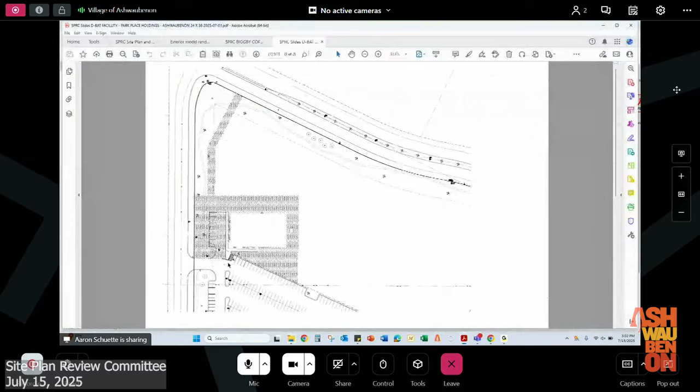Okay, there we go. All right, the requested site plan review is for a new building. It'll be fronted on Layden Drive with West Main Avenue to the north. As you see here on screen, this is a currently vacant lot that was part of the former Ameriprise building off of Packerland Drive in the business park.

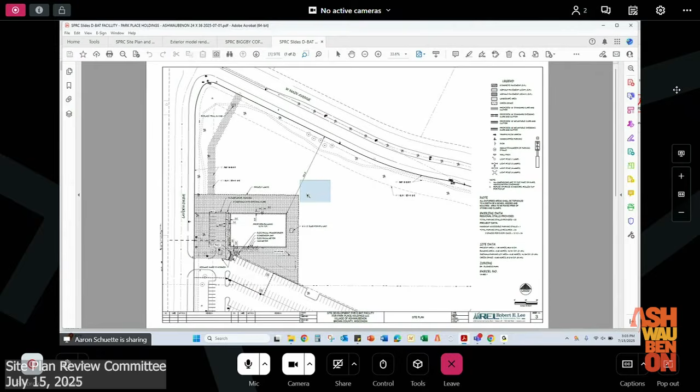As you can see, the proposed building itself, zoom in, a little over 13,000 square feet, parking lot in front, additional parking with cross parking access easements to the south to the existing parking lot. Building itself, and then just slide, continue down.

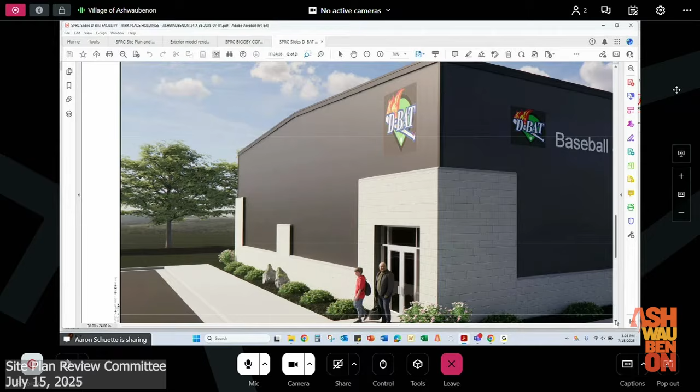Exterior materials that you see here include the minimum 3-foot masonry wainscot with some additional architectural detail with the masonry, smooth architectural metal wall panels with fully concealed fasteners.

Under the code, when you have indoor athletic facilities within the business park, there are certain criteria that do need to be met under the code. The staff report does identify how the proposed baseball training facility does meet those criteria, primarily due to the need for high ceilings for such a facility.

In terms of recommended conditions of approval: use of fully concealed fasteners for exterior wall panels, screen any rooftop or ground mounted mechanical units visible from the property boundaries or public right-of-way, submittal of a lighting plan for review and approval by the Community Development Department, locate ADA parking space on the shortest accessible route of travel from the adjacent parking to an accessible building entrance, meet all applicable requirements of the Ashwaubenon site plan review and all other applicable village ordinances.

From engineering: evaluate installing the sanitary lateral with the new water lateral on Layden Drive as opposed to West Main Avenue. Village engineer has been in contact with Robert E. Lee and Associates, the engineering firm on the project. They've been going back and forth, working through some alternatives on that.

Stormwater management: as disturbance is less than 1 acre of land in proximity to the airport, the bioretention facility is not required. Again, if there is to be more development on this property, whereby the totality of the disturbance exceeds 1 acre, then stormwater management will be required at that time.

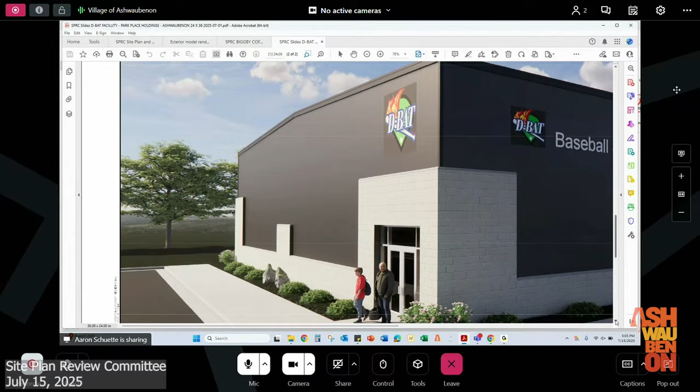From Bike and Ped, they identify bicycle parking near the entrance. Recommendation is to have bicycle parking meeting the standards of the Association of Pedestrian and Bicycle Professionals. Again, as a recommendation, that's just a best practice for the developer to consider. It's not something that we require under our code, but is a best practice. Just keep in mind, more of a heads up to the development team.

If you have any questions regarding the project, I'm happy to answer them. Otherwise, we do have a representative from Robert E. Lee in the audience as well.

Does anybody have any questions? None. Anybody want to make a motion? Move to approve with conditions. A second. Okay, we have a motion to approve with staff conditions. Any other comments, conditions, concerns? Hearing none, all those in favor say aye. Opposed? Motion carried. Thank you.

6B, consider, discuss, and act on a site plan review request for the Station 433 condominium building at 433 Aldon Circle, parcel VA-1556. Aaron? All right, I'll share my screen again.

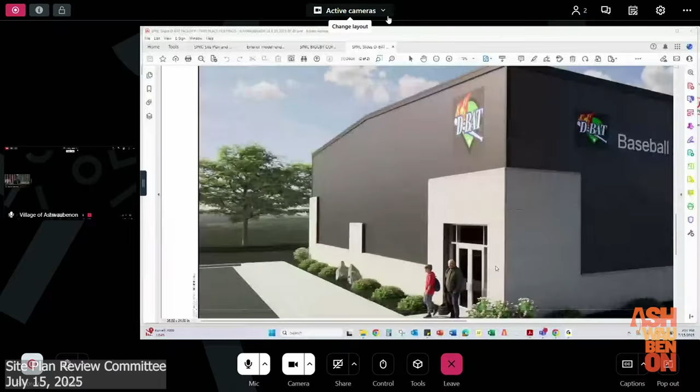Hopefully Adobe cooperates with me. There we go. All right. These are the exterior renderings of the proposed condominium building called Station 433 at Aldon Station. It's not going to cooperate with me. Bear with me.

All right, we'll start with the site plan. This is for Station 433 condominium development by Redo Homes.

This would be located immediately to the west of the current Station 417 condominium building, located on the Fox River and Ashwaubenon Creek, across the creek from Ashwaubenon Park. The project itself is located on the south side of Aldon Circle.

In terms of parking, there is parking at grade right here in front, as well as basically a podium style parking at grade with the residential units above them.

It should be noted that there are environmentally sensitive areas and floodplain on this property that will be taken into account throughout the development process, including the floodplain flood elevation of 587.7 feet. The first floor elevation is well above the flood elevation, so it won't be an issue. Just make sure you're going to maintain that grade throughout the process.

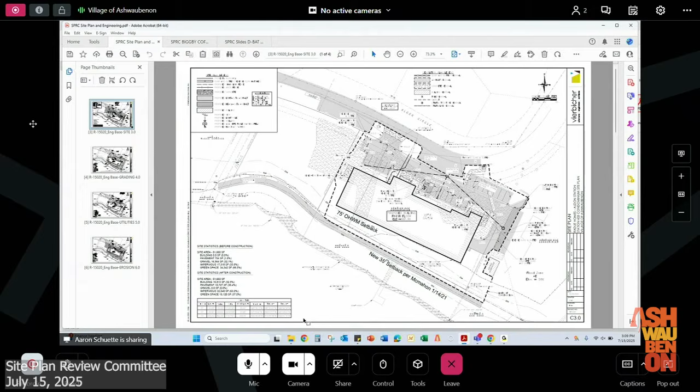Exterior lighting is limited to that necessary for emergency egress. I'll try to find the renderings again, hopefully they come up. There we go. So you can see the roof lines and architecture is similar to what currently exists at Aldon Station, so it's complementary to what is there.

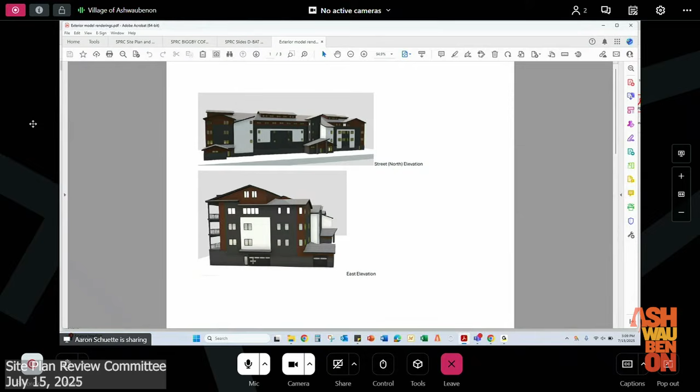There are a total of 19 units on floors 2 through 4, with the first floor being the podium parking that you see here with the garage access right here. And just the other elevations of the project that you see here.

In terms of recommended conditions of approval: as the building is greater than 50 feet tall and within the airport zoning district C, the applicant must obtain an application for height permit and approval from the FAA and Green Bay Austin Straubel Airport Director.

Screen any new rooftop or ground-mounted mechanical units and generator visible from the property boundaries or public right-of-way. Identify at least one van-accessible ADA parking space and one standard ADA parking space within the interior parking at the shortest accessible route of travel from an accessible building entrance.

Move the westerly parcel VA 1556 parcel line further west to maintain a minimum 16-foot side yard setback for the condominium building. No grading, filling, cutting, or stockpiling of soil within the flood fringe or ESA. Install a silt fence to denote the northernmost flood fringe or ESA boundary.

Catch-all: meet all applicable requirements of the Ashwaubenon Site Plan Review Ordinance and all applicable village ordinances. From engineering, install and maintain proper erosion control during construction and until landscaping is established. No comments from public safety. From forestry, approval of the landscape plan by the village forester, and no comments from bike and pedestrian.

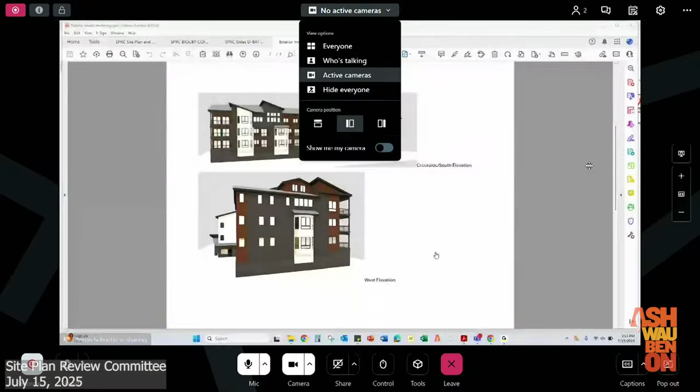So far so good. All right, this is a resubmitted site plan for Biggby Coffee located at the northwest intersection of Spirit Way and West Main Avenue. You'll note that West Main Avenue is County Highway GV. The initial site plan did indicate access to Biggby Coffee from West Main Avenue.

That access was ultimately not approved by Brown County Highway, so the applicant has resubmitted a revised proposal with access off of Spirit Way. The driveway itself is about 135 feet north of the intersection with West Main Avenue, just for reference.

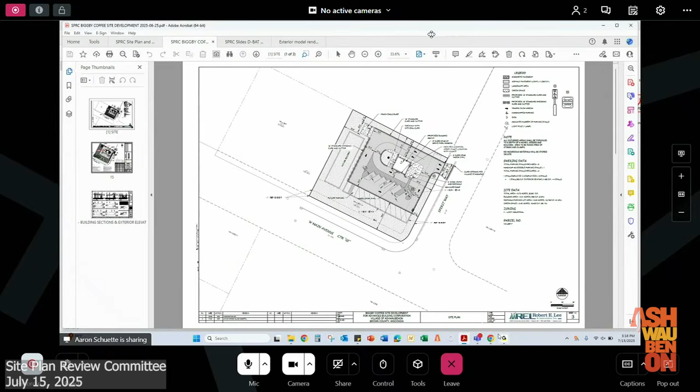I have one question regarding the west side of that building—there's possibly a future building planned to go up in that area. Is that included in a separate permit, separate plans, nothing included in this right now? That's correct. That would be a future site plan review and approval.

So Aaron, I have a question. The recommendation isn't a condition of approval, but engineering was concerned about doing a traffic study. This is the final site plan approval, is it not? Yes, it is. Did they do that traffic study?

No. And again, that's not something we can require under our code. But it's something we're recommending the developer do, just to confirm there are no traffic issues with the proposal.

Okay, what if there are traffic issues? What's the recourse? My question would be, can we approve subject to the conclusions of the traffic study, under that condition? We can approve with those conditions, but the recommendation isn't something we can specifically require, because it's not within our code—it's something we recommend under our site plan.

Basically, it's saying to the developer, hey, this is a concern that came up. We can't require it, but we certainly want to bring it to your attention that this is a concern from the staff.